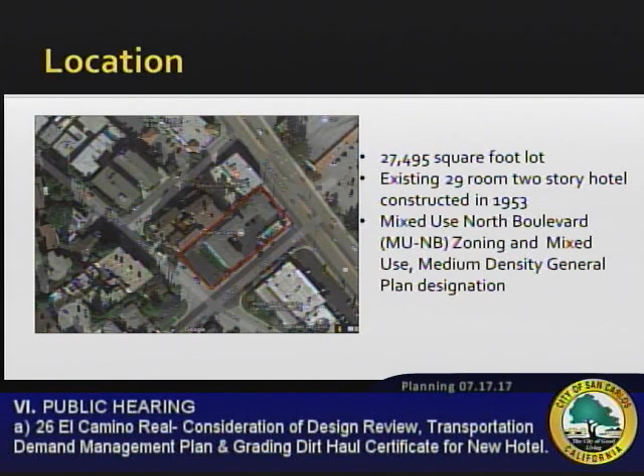The building was constructed in 1953 with some upgrades completed in 1991. The site is zoned mixed-use North Boulevard with a general plan land use designation of mixed-use medium density.

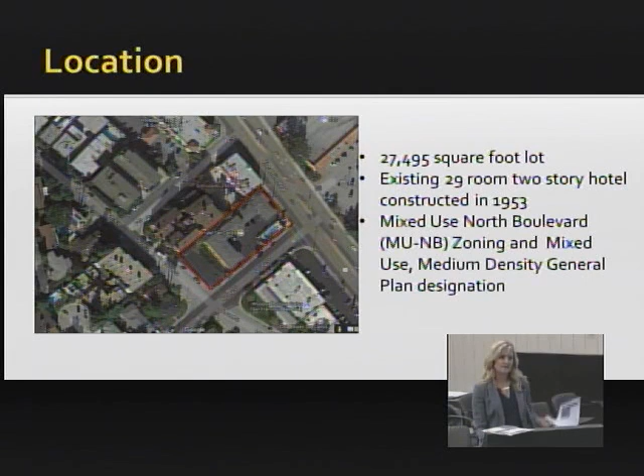A condominium building is located just to the north, adjacent to the site at 1 Laurel Street, with an office building also located to the north along El Camino Real. There's a mix of retail and service uses located along Spring Street, just south along El Camino Real, as well as across the street on El Camino Real is regional serving retail.

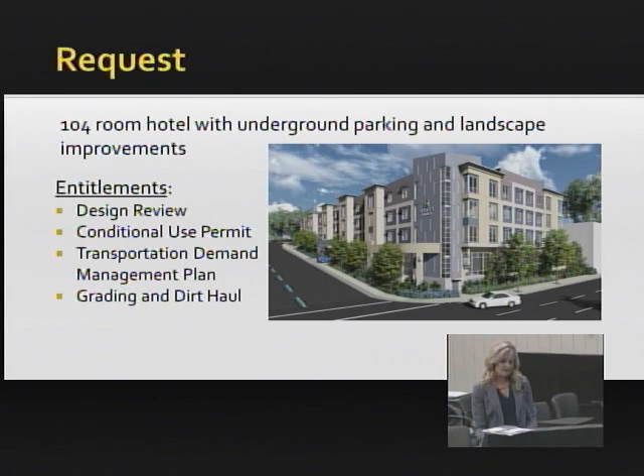The applicant is requesting development of a 104-room hotel with underground parking and landscape improvements. The entitlements include design review, a conditional use permit to allow parking within 40 feet of a street property line, a transportation demand management plan, and grading and dirt haul to accommodate the below-grade parking as well as lower the building into the hillside.

A traffic study was completed by Hexagon Transportation Consultants, which determined that the project with implementation of the TDM measures would generate a net increase of 29 a.m. peak hour trips and 33 p.m. peak hour trips. The study evaluated traffic conditions at 4 intersections in the project vicinity and determined that the project would not have a significant effect on the level of service at those signalized intersections and did not warrant any traffic improvements. Hexagon staff is here this evening and is able to respond to your traffic or parking questions.

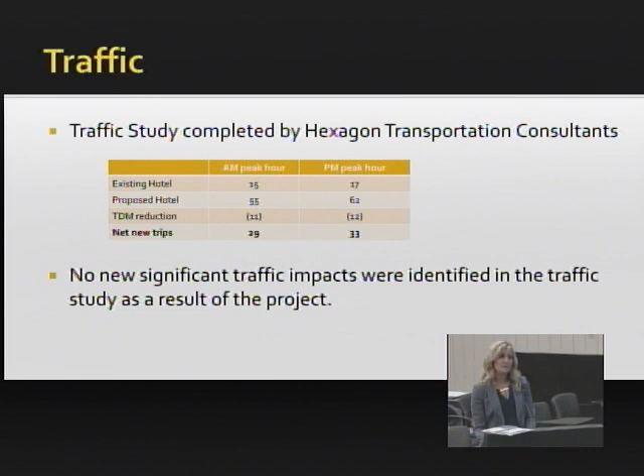The city retained the services of David J. Powers to evaluate the appropriate environmental analysis consistent with the California Environmental Quality Act guidelines. Based on their analysis of the proposed development, the project meets the criteria for an infill development exemption. No further environmental analysis is needed, and their memo detailing that analysis is included in your packet.

So the next item up is your design review. This is a view of the building at the corner of El Camino Real and Spring Street. The architectural design of the building is contemporary with the use of painted cement plaster and smooth panel systems, sunshades, a glazing system with white window frames and metal shades. There's also stone treatment at the base of the building, and I have the color and materials board for you.

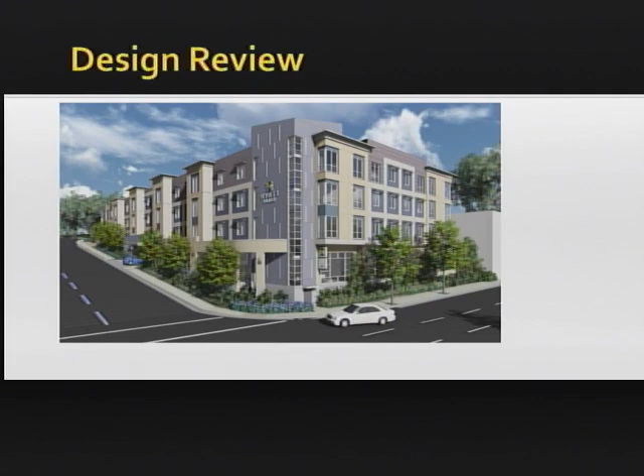This elevation along El Camino does have larger windows, as I indicated, the stone base with metal lattice as well at the base for some landscaping to grow up that portion of the building. They're also going to widen the sidewalk by 3 feet along El Camino Real and add 2 new street trees.

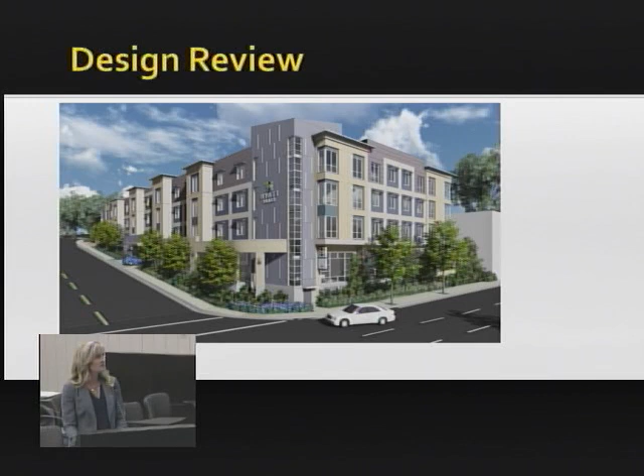Just another view as you would be seeing it driving south on El Camino Real. The white block next to it is a massing of what that office building next door at 3 stories would look like.

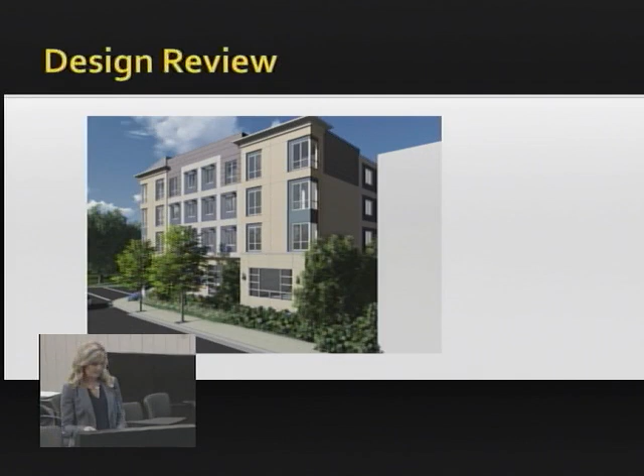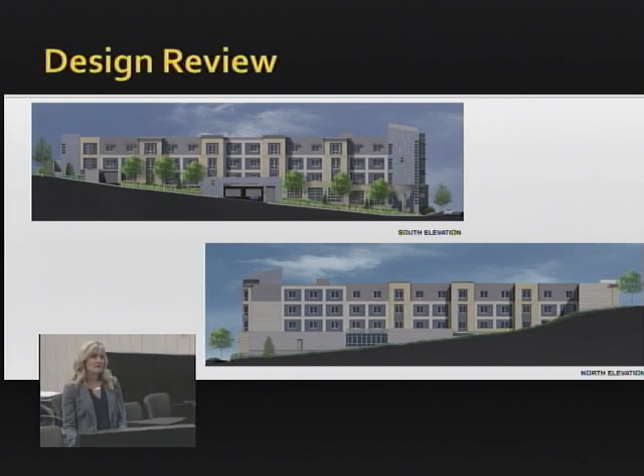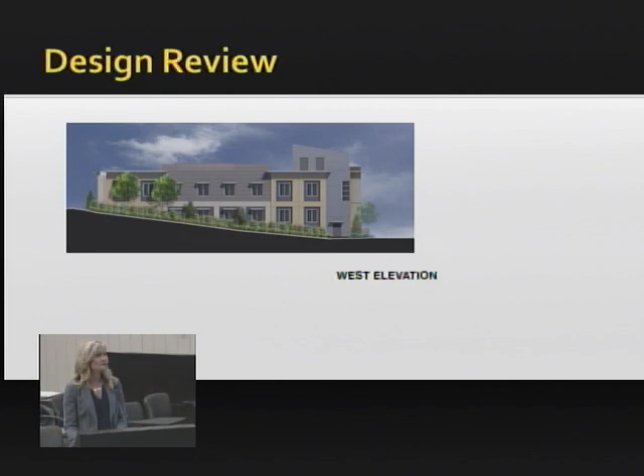The west elevation is viewed along Laurel Street. Staff has added a condition requiring additional tree planting on Laurel Street, mentioning a minimum of 2 additional trees. As you see here, since the building is sunk into the hillside, it appears as really a 2-story building from the rear at Laurel Street.

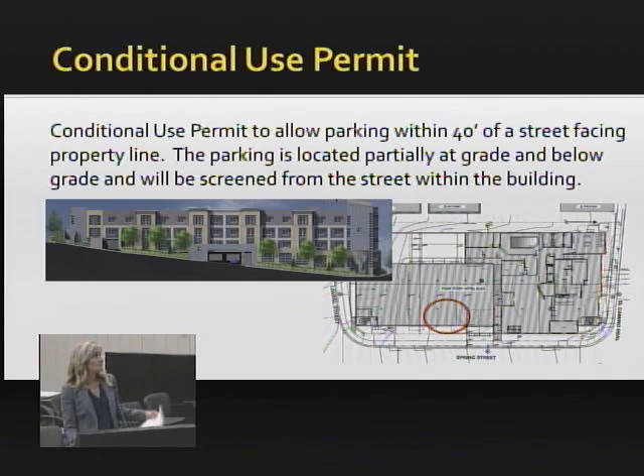For the conditional use permit, it is a requirement that parking be set back at least 40 feet from the street-facing property line. The parking is fully enclosed within the building and will not be visible from the street, but I've highlighted the area that is within that 40 feet of the street-facing property line. It's about 7 feet from the property line, and I believe about a little over 20 feet from the face of the street. So it will be fully enclosed within the parking structure and will not be visible from the street.

San Carlos does require transportation demand management programs to be submitted with new developments. The applicant has submitted a plan that addresses the proximity to transportation, takes advantage of the use of Caltrain with subsidized transit passes for employees, as well as other financial incentives for employees to use alternate modes of transportation. They also note on-site amenities available to employees as well as guests. In evaluating these measures, the TDM plan does comply with the city's 20% reduction, and as noted in the conditions of approval, they will submit annual reporting showing compliance with the TDM, as well as a 5-year reporting on the trip reductions.

For the grading and dirt haul, approximately 12,500 cubic yards of soil will be removed from the site to accommodate the below-level parking as well as lower the building into the hillside. The applicant estimates that would be 625 truck trips, taking about 30 days to complete the grading. The haul route is Highway 101 to Ralston, El Camino to Spring, to the site.

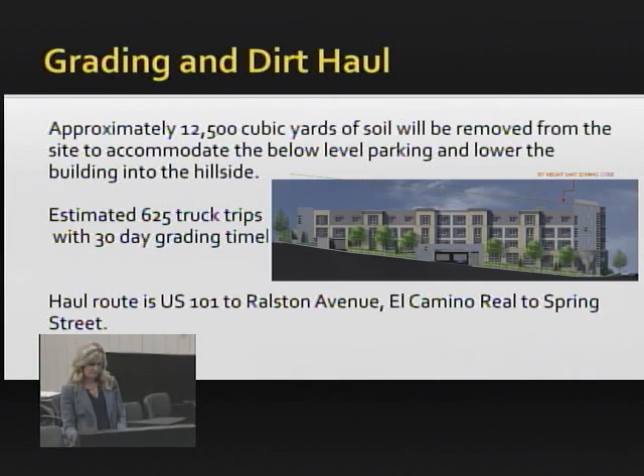The applicant has hosted 2 neighborhood outreach meetings, one on April 5th and the other on June 13th. The city most recently mailed 2 notices: one was a letter informing neighbors and occupants of this meeting, and the other was the city's required 10-day public notice.

During those outreach meetings, comments were summarized, including concerns with insufficient on-site parking for employees and hotel guests. There were also comments that Laurel Street is currently being used as a cut-through, experiencing speeding and higher traffic levels than in the past, and concern about the additional traffic the hotel would generate.

There was concern with the height of the new building and the impact to existing views. They requested the hotel remove the top floor of the building, and asked for story poles to better understand the building height and massing. There were requests for additional landscaping along Laurel Street, concern with impacts during construction, privacy concerns with the view into the hotel guest rooms, mostly on the north-facing elevation as viewed from the condominium units directly across, and concern with noise and fumes from the parking structure.

The applicant's architect will go through some of these slides in more detail, but to briefly orient you: the condo is directly adjacent to the proposed hotel building. One section of the hotel building is 22 feet from face of condo wall to face of hotel wall, and then the rest of the building jogs back so the upper levels of the hotel building are approximately 50 feet from the face of the condo wall to the face of the hotel wall. They've also oriented it to where the existing office building is.

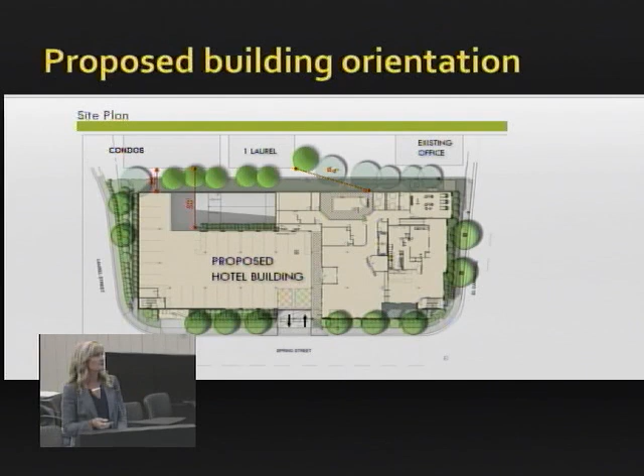As indicated, the architect did do some view study simulations, as included in your packet. The adjacent condominium building at 1 Laurel sits on top of that hillside - the first level is the garage, and they have a stacked condominium unit, so their units are on the 2nd and 3rd floor.

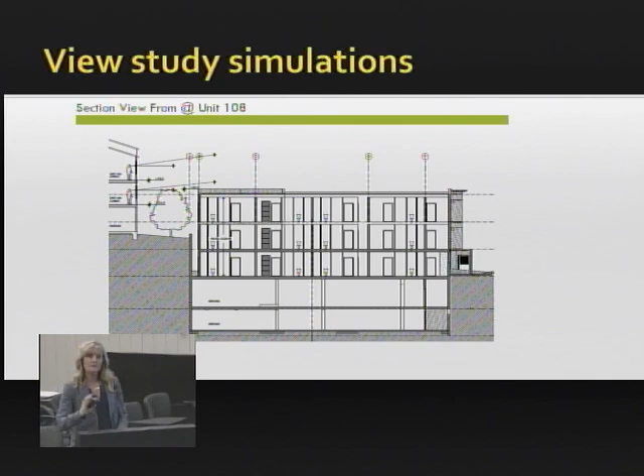This shows the view out the 2nd and 3rd floor from the first unit closest to Laurel Street. You do see there would be some obstruction of the lower views, but the view of the horizon would still be maintained. The city protects public views as indicated in the staff report, but does not protect private views from individual properties.

This shows that unit - the downstairs is first on the left, showing the existing view. With the new hotel building, the lower portion of that view would be obstructed, but the view of the hills and the horizon is maintained. For the upper level, the 3rd floor, it's a little dark, but you can see there would be some limited view across Spring Street, though again the views of the horizon and the hills would be maintained.

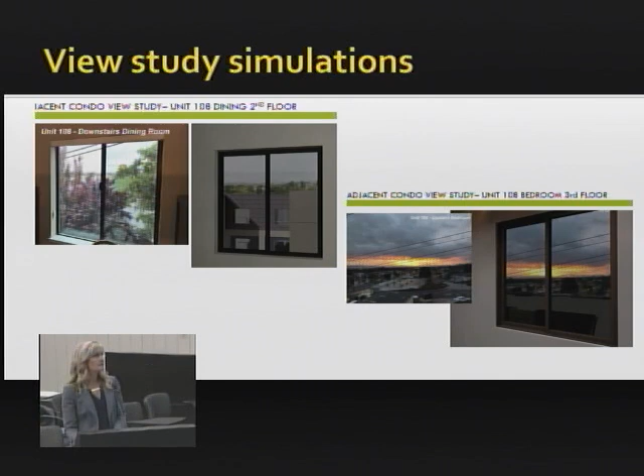If the Planning Commission is prepared to take action this evening, we do have the formal motion. Staff does recommend approval of the project as it meets all of the criteria outlined in the code for the new development. I'd be happy to try to answer any of your questions.

Does anyone have any questions for staff at this time? I do have a question - as far as TDM reporting and compliance, have we had any other projects that have come in to staff with those compliance results, and how do we deal with those?

I'm not sure that any have been at that stage yet. Maybe I'll defer to Beth for the TDM plan. The one project we probably have on our schedule that is complete and in operation is the Palo Alto Medical Foundation. All of the others are still in the process of getting built, and after operations commence, we'll bring those back to the commission. So at this point, we don't have very many examples, except for PAMF, which is forthcoming.

And then I know that a lot of the neighbors, and certainly probably everybody that lives in the city, has had some concerns about construction staging hours and some of the overflow that's gone into the neighborhood because of that. What steps does the city take when that becomes a problem, and what steps should the neighbors take should they find issues with compliance around construction?

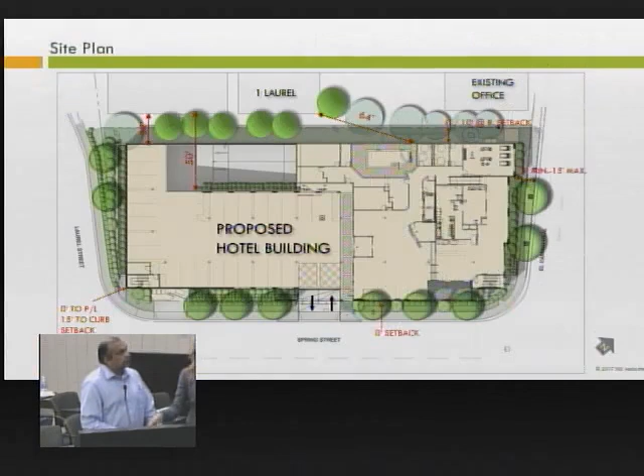All right, so I have a very brief presentation, and then I'll hang around if you have any specific questions relating to the design. So I will just walk you through some of the slides that we have.

Essentially, the site is located in a mixed-use boulevard zoning of San Carlos, and the development standards acknowledge the opportunity that this site presents in this area. We have met all the design guidelines that the zoning code establishes, and as you can see, it allows for a pretty generous FAR as well as design guidelines in terms of setbacks and proximity to El Camino.

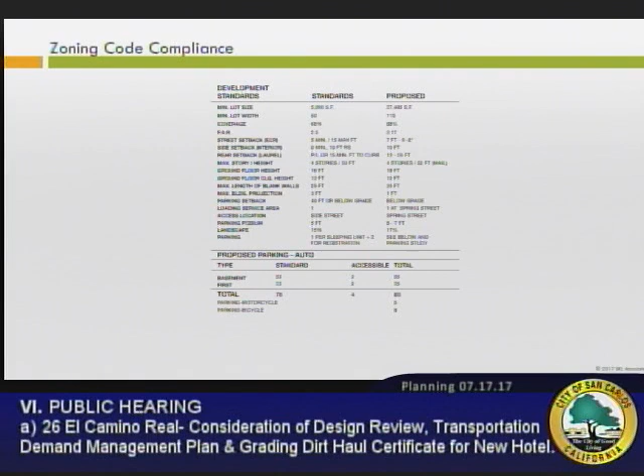As far as the setbacks are concerned, on El Camino we have a minimum of 5 feet to a 15 feet maximum setback, and we have provided a minimum 7 foot setback due to an easement along El Camino. On Spring, there's a minimum setback of 0 feet. On the north side, there's a 10 foot setback required between the property line due to the residential development, but without the residential, you could go as close as a 0 setback on the north side. On Laurel, it's a 0 setback to the property line, with a maximum setback of 15 feet to the curb side on Laurel.

Early on, staff had told us that there's always a concern for the residential people behind, so do something that you can reduce the height of the building as much as possible. So our original scheme naturally was to try not to go into the ground, because the ground itself is solid rock, basically, so we're trying to avoid the cost of that.

As a result, as you can see on this slide, the 50 feet height is marked with a dashed line. We pretty much sunk the building about 35 feet into the ground, and as a result of that, it's going to cost the owners quite a lot to take all that dirt out of there. The good thing is that the rock will also help with the retaining wall situation—you can use the assistance of the rock to maintain the structural integrity of the retaining wall.

This picture shows you the existing context looking from Laurel onto the condo buildings, and you can see the existing tree cover along on their lot. On the hotel side, we can't have any tall trees because of the easement. The 10 feet easement starts off somewhere mid-block and goes all the way across Laurel.

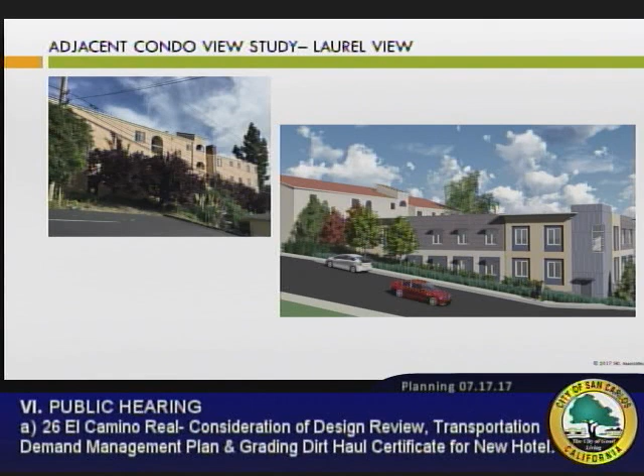We had a couple of neighborhood meetings, one in April and one in June. Due to that, we prepared several exhibits to try to show the neighborhood folks who were concerned what the impact of this hotel will be. As a result of that, we got more information on the heights of the various floors on the condos.

A few of the condo inhabitants were kind enough to send some pictures to us from their living room because they were the most concerned about the impact of this project.

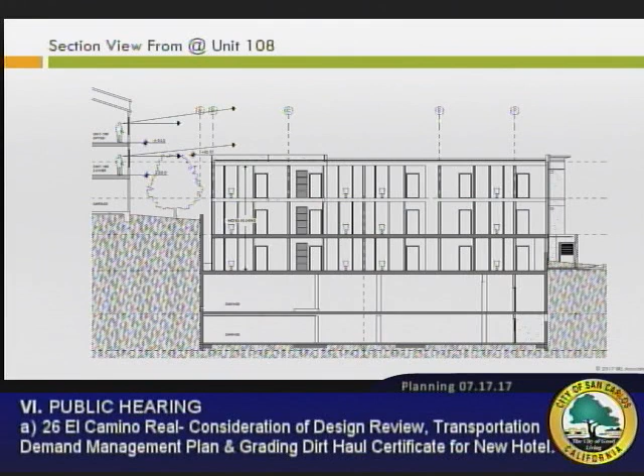So this is the condo on the corner of Laurel. On the second floor is the dining room, and as you can see, they're looking right now through the trees to the top of the existing roof of the building. On the right side, we removed the trees just to give you an idea of how close, or what the impact will be, of the new building.

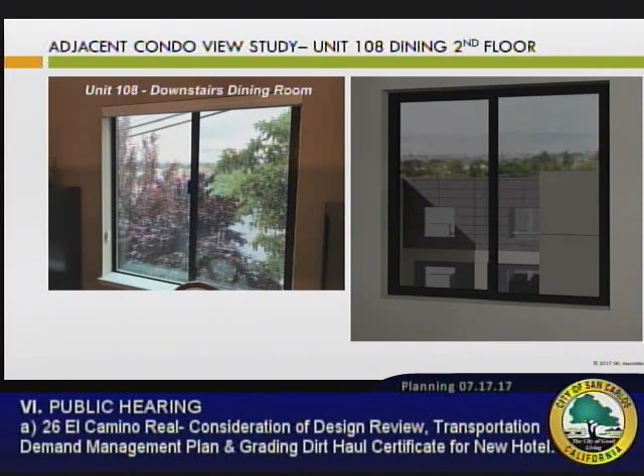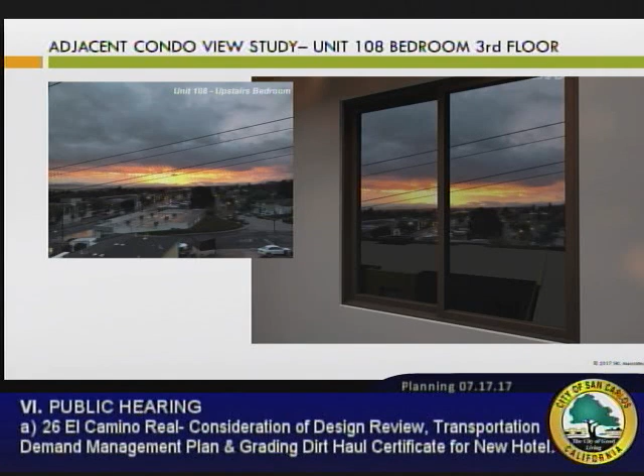This is on the third level of the condo, taken also from an upstairs bedroom. You can see the neighbors were really concerned that they didn't want to miss the sunrise views in the morning, and that view is pretty much maintained except for some building in the foreground that takes off the lower part. But if you put the trees back there, the trees will probably screen off some of the view of the hotel.

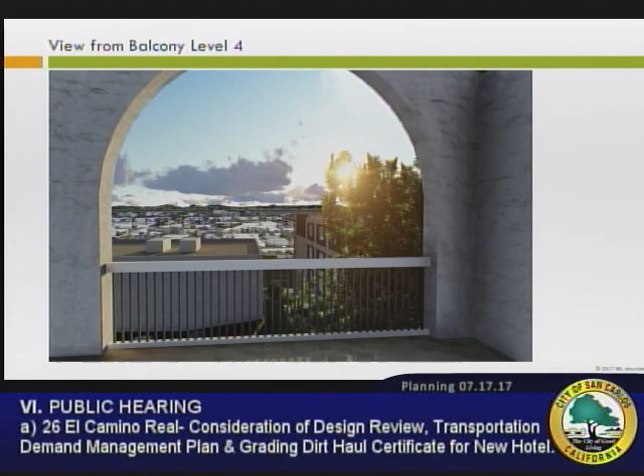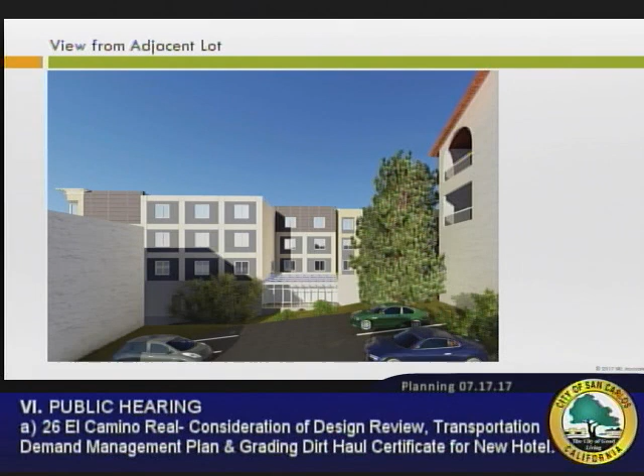This is on the upper floor of the same unit. This is mid-block looking from F Street towards the new building over the parking lot, and you can see the corner balconies of the existing condos out here. About 50% of the lot faces the condo, and the remainder faces the parking lot and the office building itself.

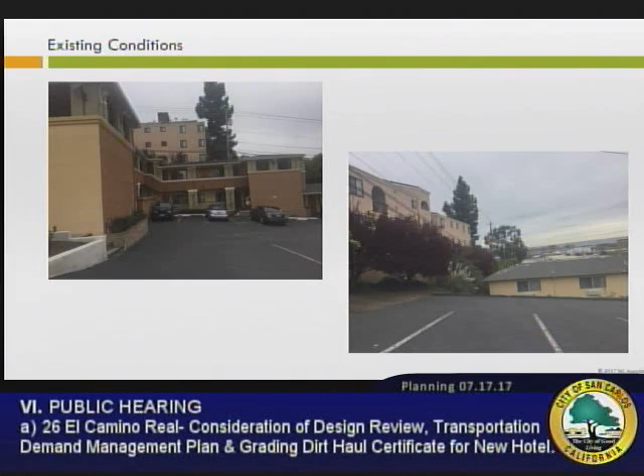These are some of the views of the existing hotel, looking from the hotel into the condos. And here's the upper parking lot of the hotel.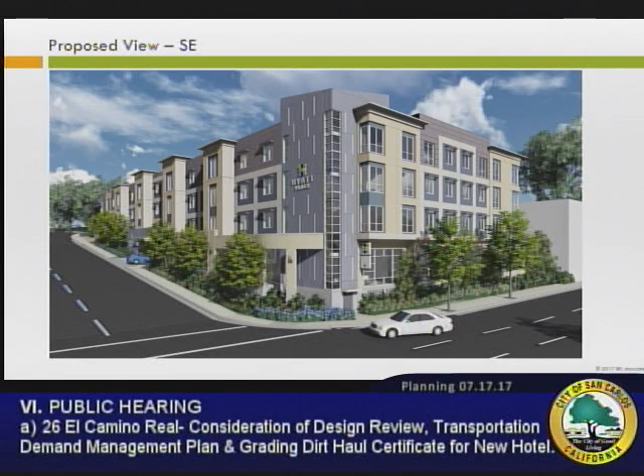As far as the design is concerned, we tried to bring in fresh material and look rather than just going with a stucco building. So we chose a fiber cement panel, arranged in a horizontal manner as well as vertically on the main staircase tower, using it as accents. That gives us a play of textures and colors, working with the fenestration, like wrapping around the windows at the corner, as well as the glass opening onto El Camino Real.

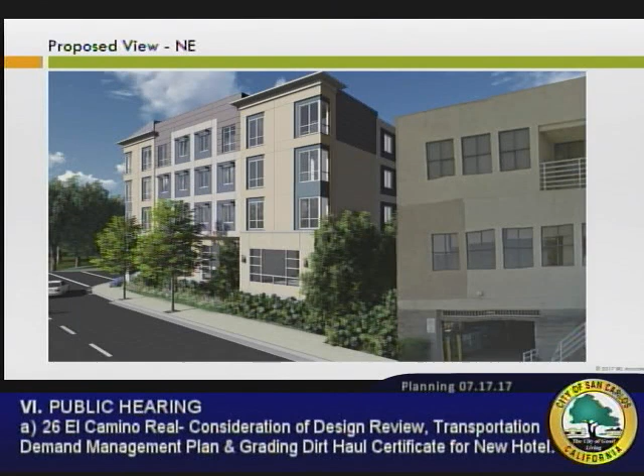This shows you in relation to the office building, we are probably about a story higher than the office building itself. This is looking from El Camino.

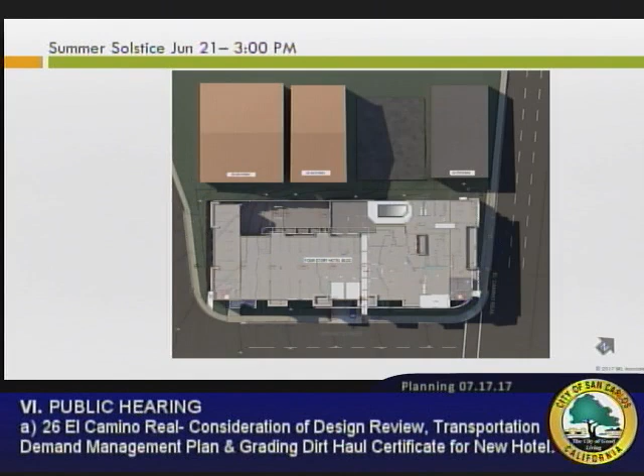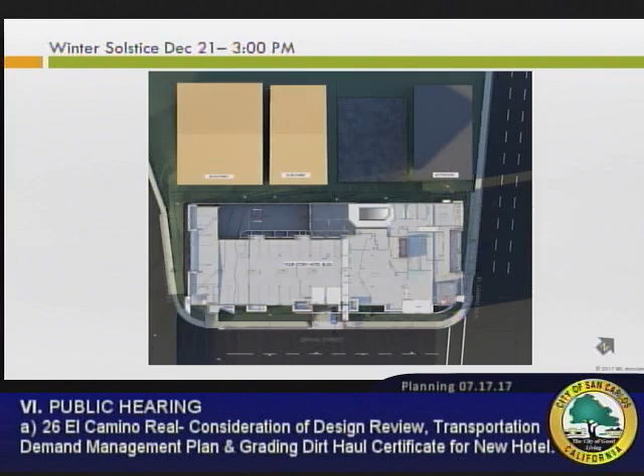As a result of the neighborhood study, we also did some solar studies, and this shows you that most of the time the shadow is away from the condos, with only one time when it's actually reversed. In the evening, the shadow starts moving towards the hotel from the condos, and you can see the shadow actually coming from the condos onto the hotel. So as far as the impact in terms of shade from the hotel side to the condo, it's absolutely negligible.

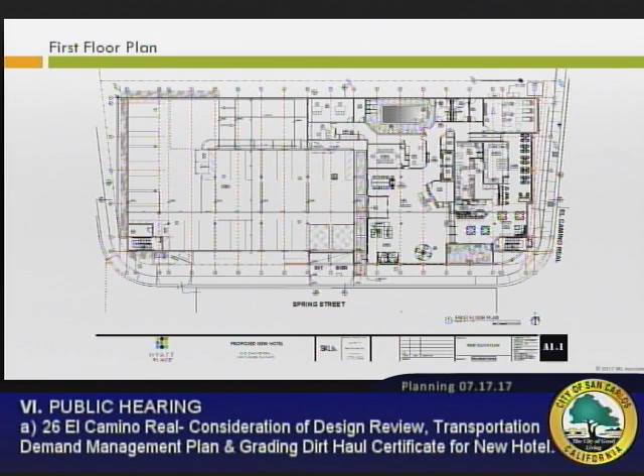So I have some pictures of the plan. In emails we just got in the evening, there were some concerns about how carbon monoxide and such will be exhausted from here. The basement is the only place where we'll have a requirement to exhaust it, because the first floor gets natural ventilation. So we will have carbon monoxide sensors in the basement, and there's a fan room on the corner of Laurel and Spring that will bring the exhaust out onto Spring, so it's not facing the condo side. We'll bring it out just above the trash enclosure, which is also at the intersection of Laurel and Spring.

As far as noise from the swimming pool and views into it, the pool is kind of tucked inside the building, facing more the parking lot, so there'll be very little exposure to the condo units.

I'm sorry, were you just showing us where the pool was? Yeah, let's see, how do I point with this? Oh, there's no laser. I think there might be one on the mouse if you wanted to try.

So this is where the pool is. It's a very small pool, and like any hotel, they'll have regulations on when it closes, probably 9 or 10 p.m. The pool is on the same side, in front of the condo building, but again, it's tucked in - there's office space on the first floor, and the pool is right next to the office space, so it's facing the parking lot of the office building.

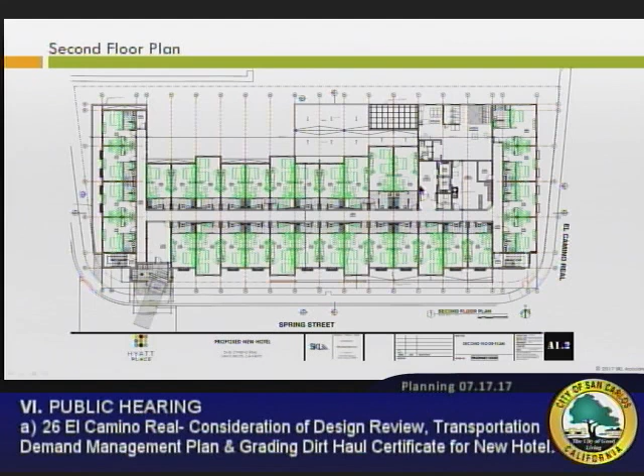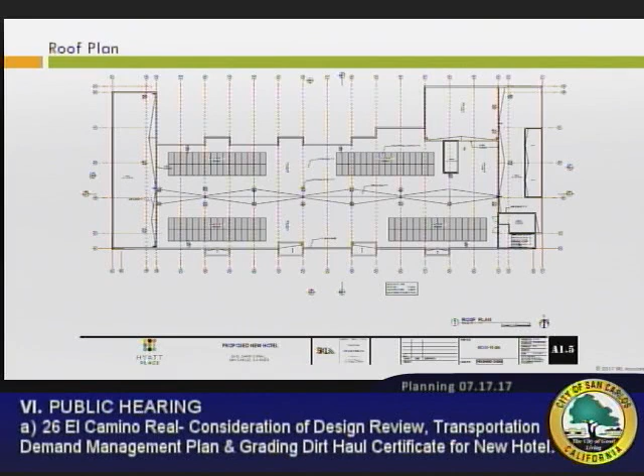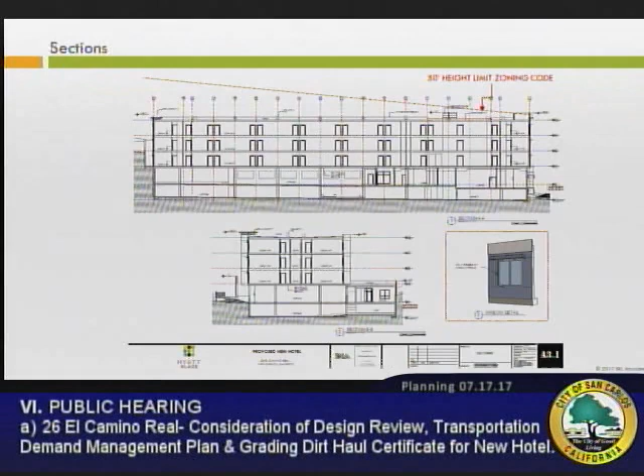With that, I'd like to conclude my presentation, and if you have any other questions, I'll just hang around.

I just have two quick questions. In the project description, it mentions a cafe - is the cafe open to the public or just for hotel guests? It's mainly for hotel guests. I'm asking because we're going to be talking about traffic, and if it were a larger restaurant meant for public use, that would create more of a traffic issue. I believe predominantly it's for breakfast only. So its intended use is for the hotel guests. Yeah, it's for hotel guests, and it's a free breakfast provided to them.

Okay, thank you. And my second question is, because the appearance of the roof does seem to be at issue - you mentioned there are options to change the colors of the roof - some residents will be looking onto the roof. Would you be open to something else that might soften the appearance of the roof?

Well, one thing that was suggested was a green roof. With a wood frame building, it's always an issue as to what you can do with the roof. If it was a concrete structure, I would be more open to doing something there.

So maybe not a roof garden, but maybe something else that might soften the appearance that would be appropriate for a wood structure. We can see what else, we can talk to staff and maybe come up with something. Okay, those are my only questions for now.

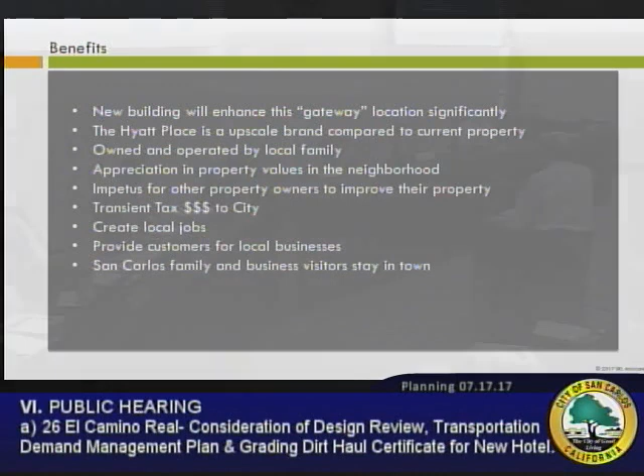People that stay here will go and patronize the restaurants and other businesses in the area. And lastly, instead of losing visitors to this area to other cities, you can keep them in San Carlos, whether it's a family visiting or people visiting hospitals nearby - they'll stay in San Carlos and contribute to the tax dollars there. Is that it? Yeah, that's it. All right.

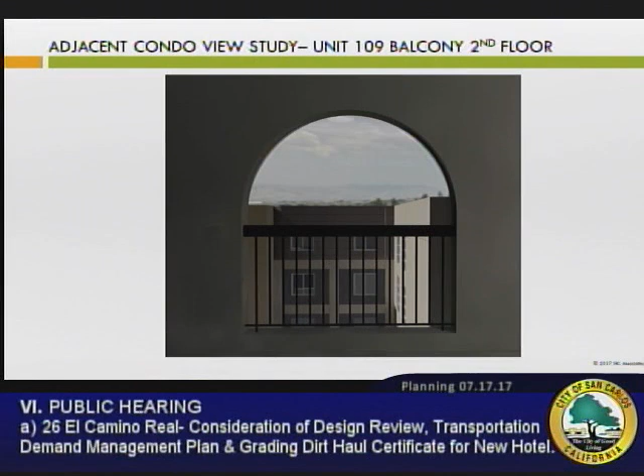Okay, and then the next one? Okay, this is also... so you have... or computer generated. Yeah, I don't know where they got that from. This is computer generated? Oh, this is... wow, they did a great job.

So you have one of those two-story units? Yes. So the first generated image would have been of the first floor, and then this one would be of the second floor. Yeah, I guess. Okay.

And so you mentioned it was your understanding that you were going to be near the pool? Because it seems like the pool is actually quite a ways away from your unit. I just want to make sure I understand your comments. From my understanding, there's a ramp for the garage on the back side of their building, which is right next to our building, and we're right opposite that. Can I see that?

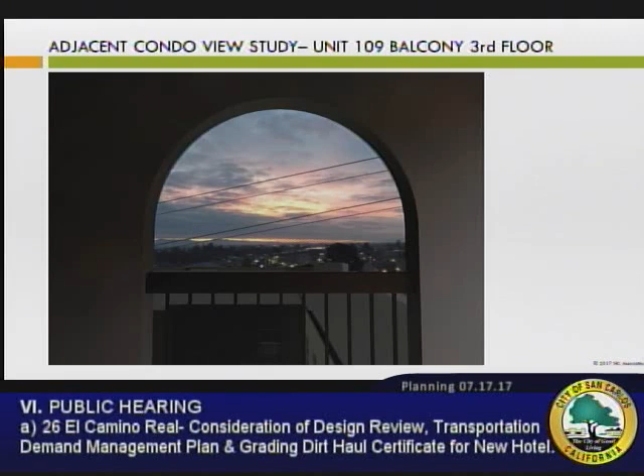So do you see where that is, can I do this? Yeah, so where the 22 is right there? You see where, oh sorry, whoa, 50, where this is? Yeah. It's the ramp going to the garage. Where the 50 is, we're like right in here. Our unit? We're right here? Oh, we're right here, okay, I'm sorry.

So we're right here, so I guess the pool is farther away. But the ramp is right there - these are right, that's our living room, that's our dining room, those are our bedrooms right here. And right now, what's opposite? Isn't there like a parking lot there right now? Yeah, which is vacant most of the time. Okay, all right, well thank you.

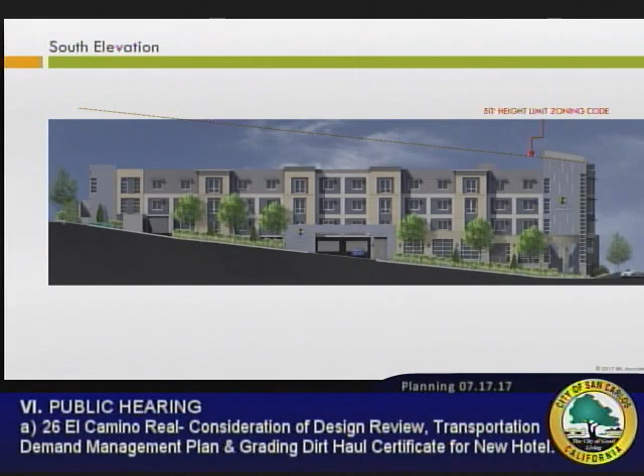The other elevation, go ahead. I think there was another slide that showed that a little bit better.

If you go back to the west elevation, back one - yeah, see the two windows on the left? Those would go away. That's one unit right there. But then if we eliminate that one unit, which is on our fourth floor, we would still have to have a little extension beyond where that tree is to house an electrical unit. So we can propose to take away that one unit, and now, being 22 feet currently, it'll be around 35 feet away from the building.

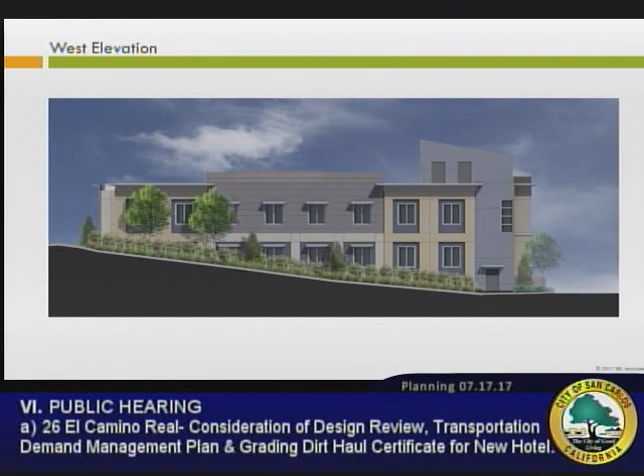Go back to the site plan. So you're moving - is there electrical up there? You said there's electrical at the end. Currently there is right now, right? There is currently an electrical room.

That separation between the two buildings will become 35 feet. So we'll lose one unit there. That's the top left corner, correct? Very top left corner.

Okay, anything else for the applicant or the architect right now? Did you have a question about somewhere else they could reduce? I did, but apparently that was over here. Okay, and apparently not what you were thinking. Well, apparently, according to them, this is already at grade. I see what you mean.

Mr. Chairman, I'd like to go back to the question about contractor parking. I'm concerned it's going to be practically impossible to enforce. I think it's perhaps more realistic to say contractors shouldn't park on the residential side of the development, but maybe allow contractors to park on Spring Street. Quite frankly, if it's not these contractors, it'll be the contractors across the street parking there. So some contractor is going to park there during construction. I'm concerned about the realism of saying no contractors can park on Spring and Laurel. I'd suggest limiting it to maybe prohibiting the Laurel Street side - that would be easier to work with.

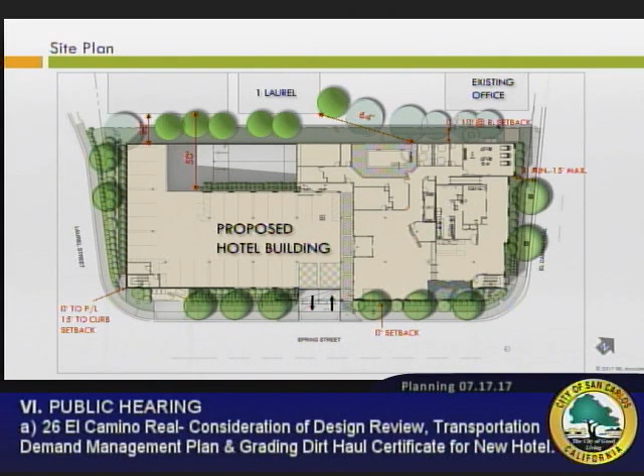Versus if you wanted the ramp to go onto Spring, so he prefers the ramp there. Well, he doesn't like it at all. Correct, but if he has to have it, he prefers it covered on that side.

What I want is a smaller hotel, and we shouldn't be beholden to what Hyatt wants. I hear you, sir, thank you. Anybody else want to be heard on that subject? Okay.

I don't know why we have to have monitored and have registration and this and that, you just park across the street over there by CVS. Thank you. Yeah, and frankly, the easier solutions are better, but I just wanted you guys to have a mechanism and recourse if things don't go the way they're supposed to. I wanted you guys to have a way to reach back.

None of this is getting into the record. I know, and I get it. The point is made.

So I would entertain a motion to close the public hearing. I move that we close the public hearing. Is there a second? Second.

I don't know who to acknowledge. Do we need to have a roll call? Do we need a roll call? So there's a motion and a second to close the public hearing. Can I have a roll call, please?

Commissioner Bergman? Yes. Commissioner Harper-Pedersen? Yes. Commissioner Gutierrez? Yes. Vice Chair Bradley? Yes. And Chair Silberman? Yes.

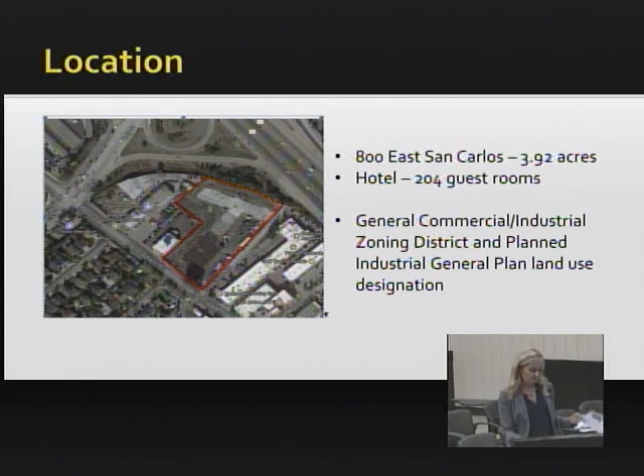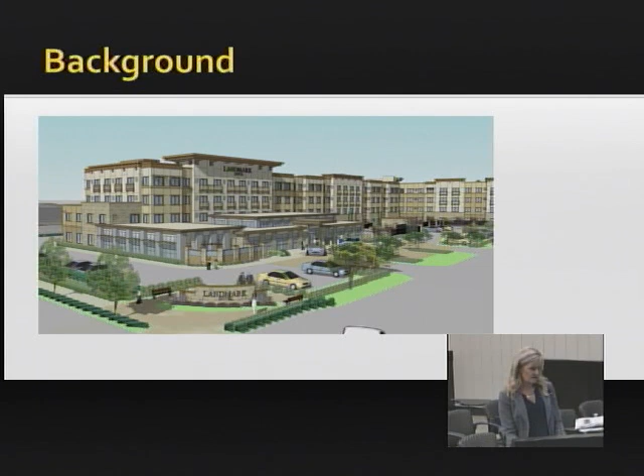A little background: the city acquired the 3 properties and marketed them for a hotel development. The city selected R.D. Olson to develop the 204-room hotel. Upon recommendation by the Planning Commission, the City Council certified the EIR and approved the development in July of 2015. The hotel is currently under construction and will be completed by the end of this year.

The code currently allows 200 square feet of signage for the property, as well as 1 pole sign with a maximum of 200 square feet of sign area. Combined, that would be 400 square feet for this site. The applicant requests a variance to allow up to 445.6 square feet of signage, and the code also requires architectural review for signs visible from Highway 101.

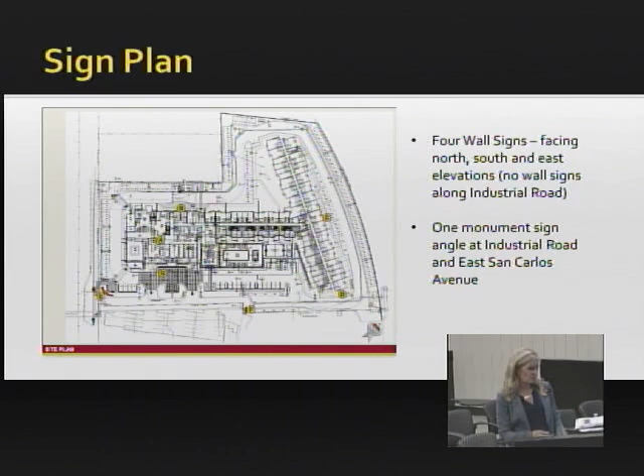An example of the wall sign: it's approximately 123 square feet in area with individually illuminated channel letters, white for Residence Inn and red for the Marriott. Staff finds the scale and size of the wall sign in keeping with the size and design of the building.

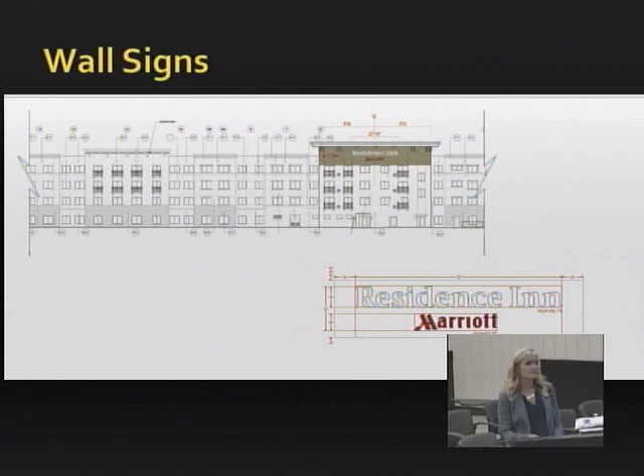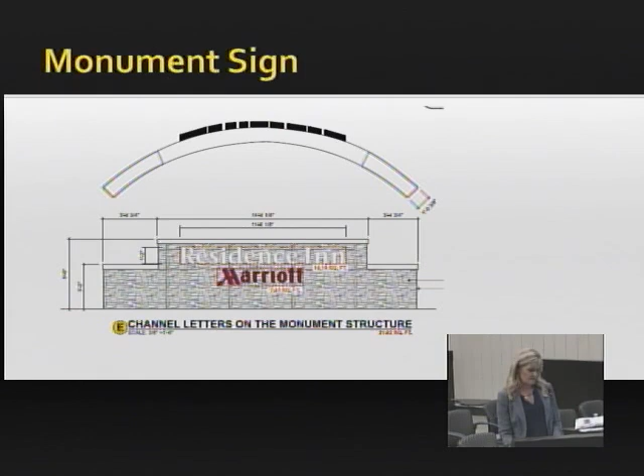This is the proposed monument sign oriented at an angle towards Industrial Road and East San Carlos Avenue. The overall structure will be 5 feet tall with a stone facade to match the building. The monument sign is 1 side only and is 21.6 square feet in area.

To consider for a variance, our code requires some very specific findings. Staff found that this is a uniquely shaped lot with narrow configuration frontage along Industrial Road, and the long frontage on the private East San Carlos Avenue. A portion of the property also wraps around behind the building at 551 Industrial Road. This property and the one at the corner are actually the only 2 large GCI-zoned properties that front a single-family residential neighborhood, which is another unique situation specific to this property and the adjacent one.

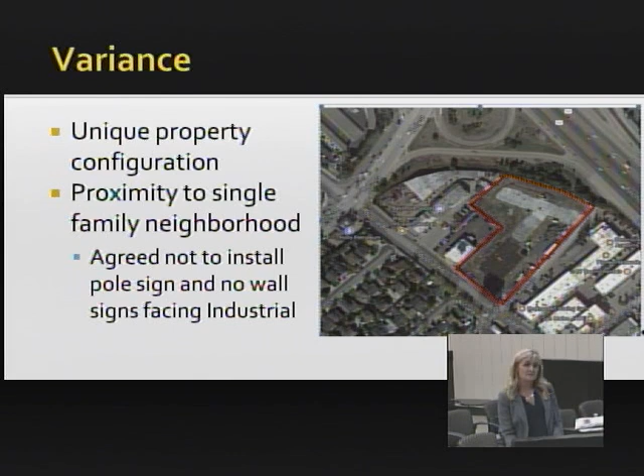Due to concerns expressed by residents, the applicant has agreed not to install a pole sign and not to install any wall signs facing Industrial Road. That further limits site visibility for people traveling to this location.

The applicant did conduct neighborhood outreach as well as outreach to the adjacent property owners. You have 2 letters of support in your packet, and I can let the applicant expand on the conversations with the neighborhood. Staff mailed and published the required public notice and did not receive any further comments. Staff is supportive of the request, and there's the formal motion. I'd be happy to try to answer any of your questions.

The applicant also has a brief presentation. Does anyone have questions for staff at this time? None from me. The applicant.

Good evening, Commissioners. My name is Tony Rozek, Vice President with R.D. Olson Development. First, I appreciate staff's thorough presentation and analysis of our proposed sign program. Let me go back in history—prior to the Planning Commission and City Council approvals, we did have several outreach presentations with the community.

During those sessions, there was one major concern. Our original proposed signage for the property had its main sign on Industrial Road, as in building-mounted, facing Industrial Road, thus facing the residential neighborhood.

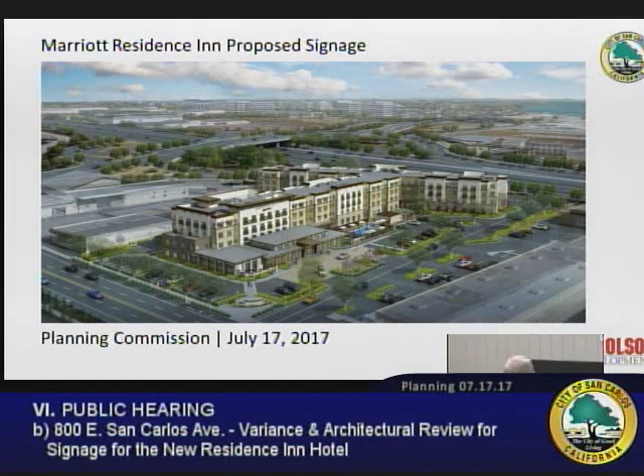The community voiced its concerns with an illuminated sign being 4 stories high and facing directly across Industrial Road towards their homes. So we were happy to accommodate and relocate the sign, thus relocating that front sign over to the 2 sides, one facing East San Carlos Avenue and one facing Holly.

And as staff had mentioned, in receiving feedback with the dissatisfaction of the In-N-Out Burger pole-mounted sign, we pulled our pole-mounted sign off the table and thus proposed 2 building monument signs, both facing Highway 101, one capturing traffic driving northbound, which would be here, and one capturing traffic driving southbound on the back side of this elevation here.

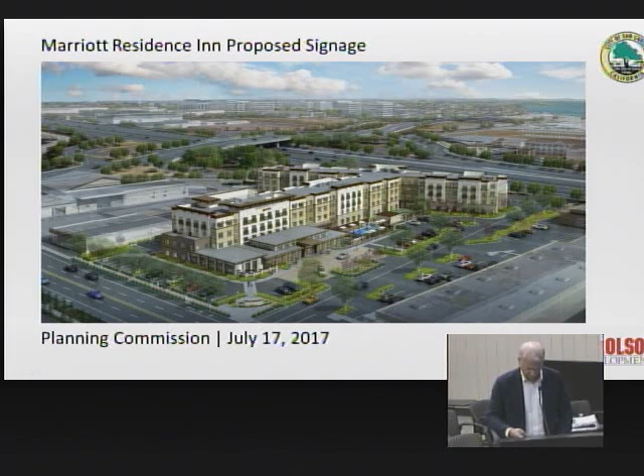So just to reiterate the location of the signs, the originally proposed sign that was facing the neighborhood on Industrial Road at this location was moved and split into two to capture traffic driving north and southbound along Industrial Road. The wall monument sign had stayed with no objection, and the pole mounted had changed and split into two wall mounted along Highway 101.

We did reach out to the community recently and offer to have meetings at the job site and also give them a tour of the current construction. 2 community members did respond, including one from the Greater East San Carlos Neighborhood Association.

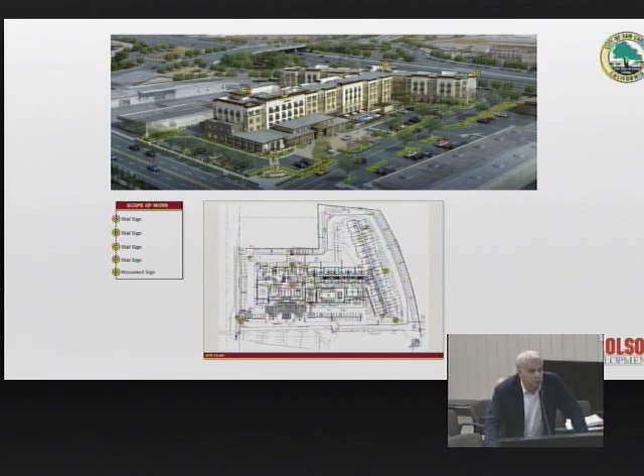And one comment was happy to hear, in that he said that you respected their original wishes and that they're happy to see that we don't have a pole-mounted sign, nor do we have a sign facing directly at the residences. So we did fulfill our promise. The only minor concern was in regards to the brightness of the signs.

So with that said, let me describe how the signs will be mounted and how they'll be illuminated. These are individually extruded letters with LED, very efficient LED lighting.

This will not be a billboard type of sign if we compare it to an In-N-Out Burger or the pole-mounted sign across Highway 101 with the Fairfield Inn and Burger King. It's not one large panel, not a 200 or 300 square foot panel that illuminates in one large sheet and acts more like a spotlight.

These are individually illuminated letters. The letters are framed in aluminum, therefore preventing light pollution to the sides. They will illuminate straight out.

The lumen factor is approximately 130 lumens per square foot. So in comparison, if we take the letter R, the largest letter within the signage, that letter R's lumen output at the source would be equivalent to a 100-watt incandescent light bulb. If you remember these light bulbs back in the day, that's how bright the R would be. And obviously the brightness would decrease.

Well, sorry, let me get the terminology correct. Brightness will be consistent, but the lumens would decrease with the letter size because it's based on square footage.